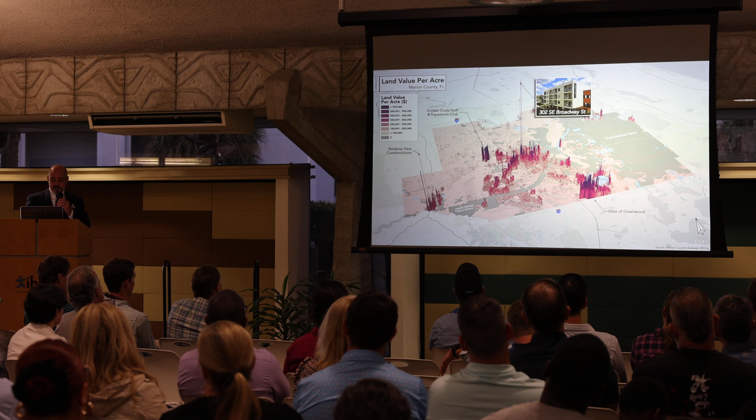So talk about it, because it does affect your community. This is your land value per acre model of your community. Why is there just one dirt parcel in your downtown that's so incredibly more valuable than everything else? Shouldn't that be more like a plateau? It's all the same downtown. This is looking at just some of the parcels that fertilize the soil under them - and remember, this is just dirt, no buildings.

So zooming into your communities, maybe taking a couple of neighborhoods - looking at West Ocala, it's coming in at about 53,000 per acre, and over in the historic district, there's actually a couple of historic districts, but it's looking at 234. My first question when I looked at this - I look at it like a CAT scan - is, why is the dirt in that historic district not uniform? It's all the same district, so it should all be the same value per acre. It's all the same access and neighborhood, because you see on the west side it's more uniform. So use these as maps to have a conversation and learn more about your community.

Okay, so now talk about what you saw in the model. Think of it as just a big bar chart laid on a map - these are the actual images in the bar chart. So everybody's got a Walmart. Your Walmart's about $400,000 of value per acre, and I'll keep the Walmart down on the bottom of this slide so you can see it compared to other housing types.

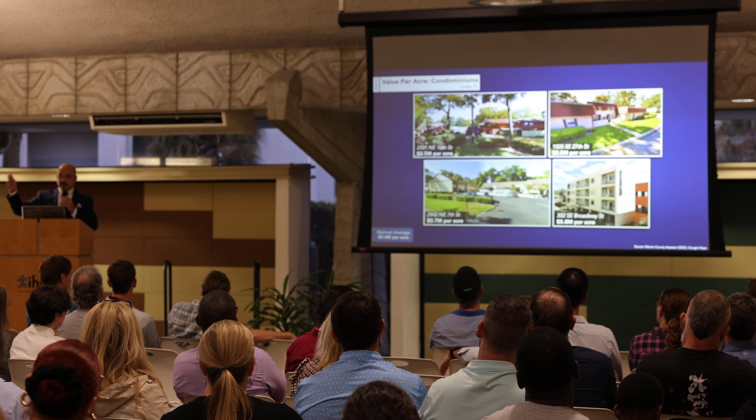But hang on a second before we go past this - these are 500,000 an acre, and that's 5.8 million an acre. They're both condos, right? So how you use land has a value productivity choice. Or if I blow through your real estate and have surface parking lots and berms and buffers and whatever else, it's going to dilute the value. Density is more productive, so there's basically an incentive in the tax system to make low density - that's the way it works.

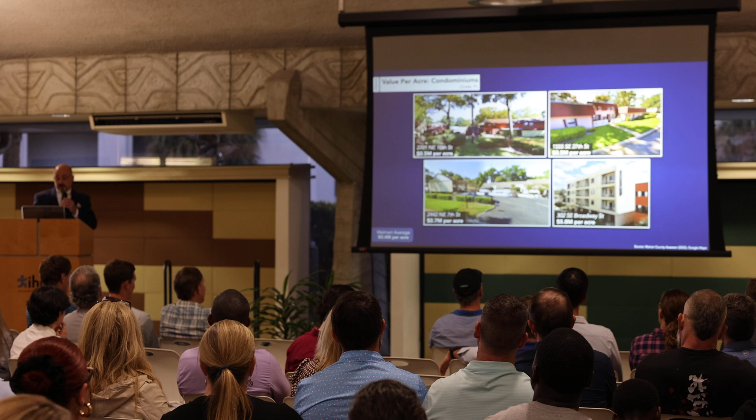But anyway, there's 800,000 - so here they are stacked up, your single family, multifamily, and again, this is countywide. I would take this information and go next level from here forward, look at your different neighborhoods in your community this way.

But we couldn't resist John Travolta's house, by the way. He's not here, is he? So he's out at that Jumbolair thing - that's his house with his jumbo jets. That's really cool. And we grabbed this house on 16th Court in West Ocala.

So here they are side by side. Travolta's house is about 20 acres, and that doesn't count the whole runway and all that other stuff - but this is just his section of that development, while she's on a tenth of an acre on the right. The tax value: his property's worth $2 million in value. Hers is worth $145,000.

When you look at the tax value per acre, it looks like this. So again, as county taxpayers, who's more productive? Jumbolair or the West Ocala neighborhood?

This joke might not work for most of the audience if they don't remember Vinnie Barbarino. It's a long time ago.

So we grabbed a couple of other neighborhoods to compare them, West Ocala with the 21st Street neighborhood. In this case, we're just grabbing the same number of houses to see their imprint in what they take. So we have 47 houses on the left and 47 houses on the right. The average value of the houses in West Ocala is about $93,000, while the average value in the 21st Street neighborhood is 262,000.

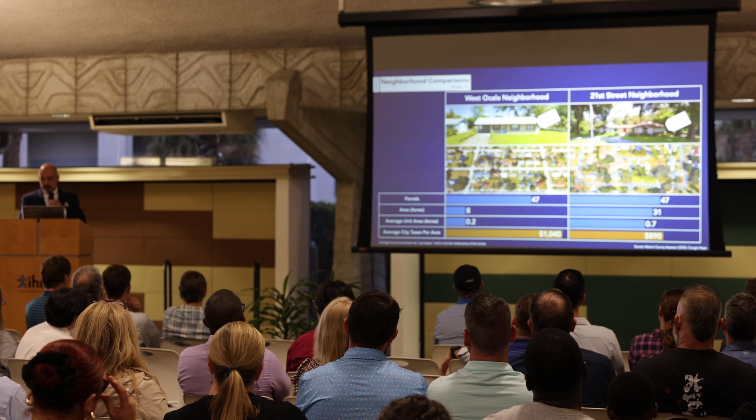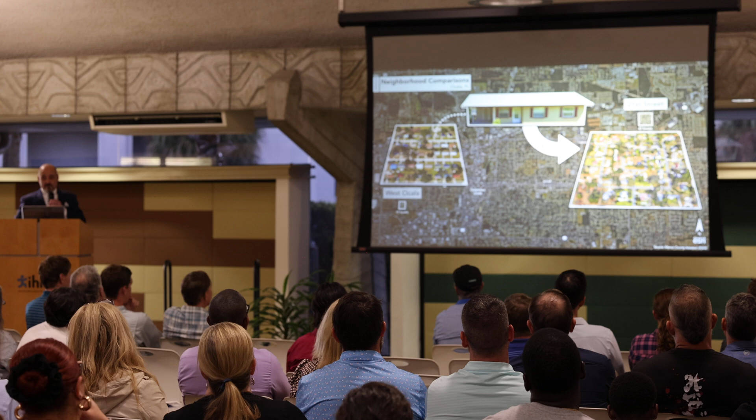So just for fun, we're like, well, what if we just developed West Ocala, or the 21st Street neighborhood, the way that West Ocala had developed, and let's see how many people we could fit in the same land area. It's 177 units would fit where 47 houses take up a footprint. Or another way of looking at it, here's the current value of the 21st Street neighborhood, about $6 million. If it was developed as West Ocala, with that house, it would be $34 million on the same territory, the same real estate.

So just be aware of these patterns that we've put down, how we've developed over time. There's results economically of what we deal with today because of it. So it's about, you get about 6 times the value out of it.

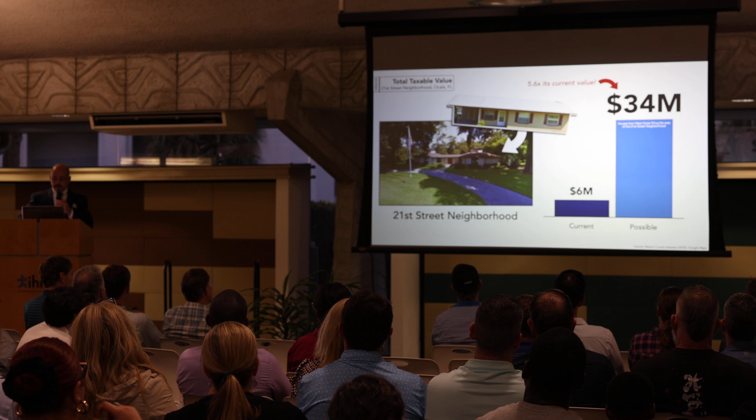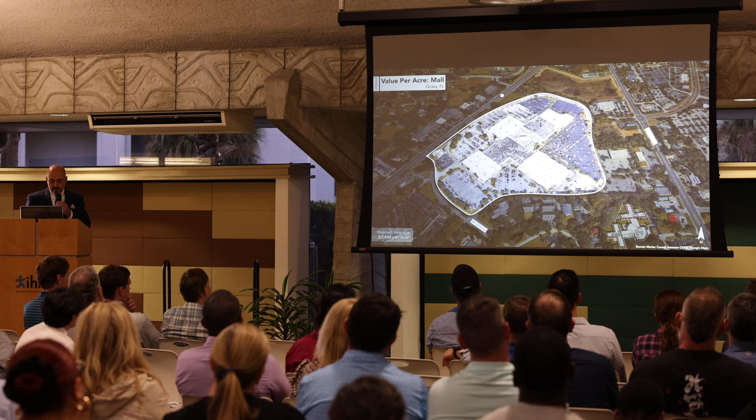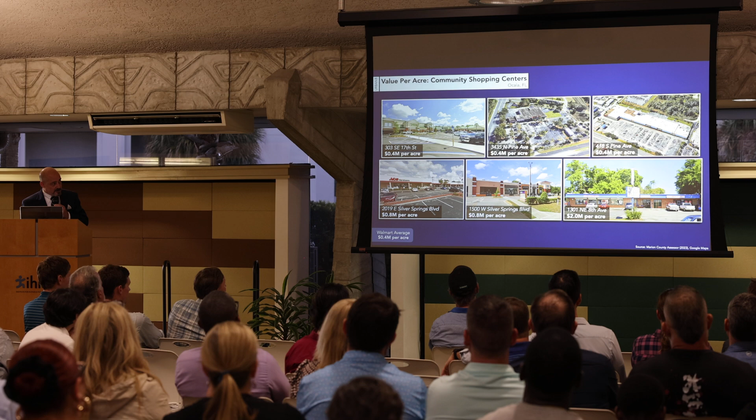So under the commercial, your mall is about $900,000 of value per acre. And again, that's double the Walmart. You can see the Walmart down there, it's still on the slide. So that's double the Walmart in productivity. A bunch of boxes here running from $400,000 to $2 million. Who would have thought that this thing is twice the value of the mall? But it is, 2.2 times.

And then you get into this commercial stuff. We start at like 7.3 million. I love O'Malley's, by the way, that thing's awesome. Was that like 8 feet wide?

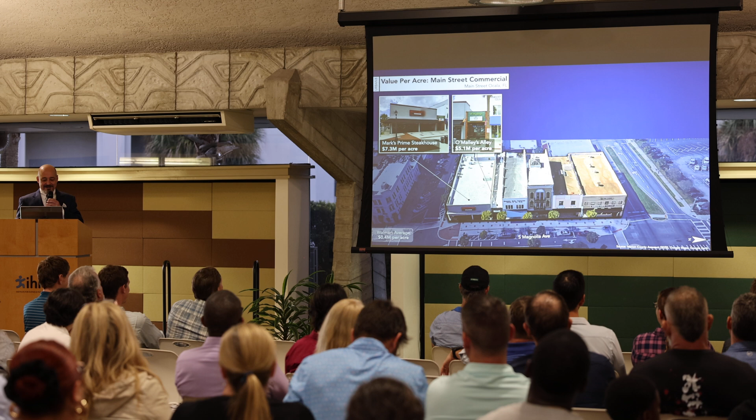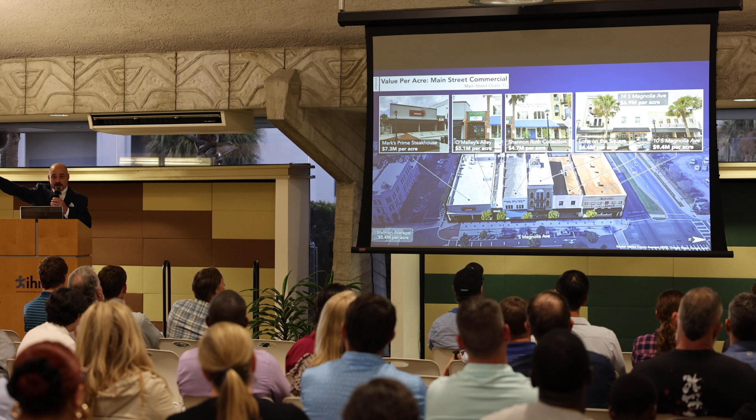Think what you can do with little buildings, make an incredible impact at 5.1 million per acre, 4.7, and then these last 3 are 4.4, 6.9, and 9.4 respectively. That's all like just 2 blocks away from here, right? So on average, your Main Street stuff's averaging 5.7 million an acre.

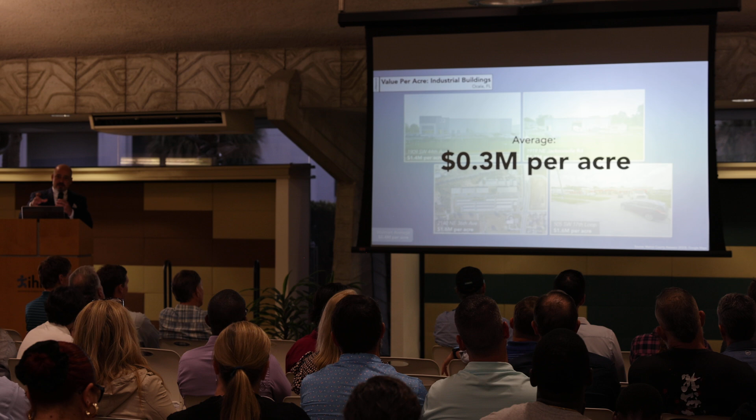And industrial, it is what it is. These are not that valuable buildings on a productivity standpoint. They're just really big boxes, but you need that stuff to produce jobs. So just be aware of that. Your average for industrial is about 300,000. And it's just, that's not surprising, it just is what it is. But be cautious about how much of that you chew through in your community and make sure you're getting jobs that come with it. Back to the final is mixed use.

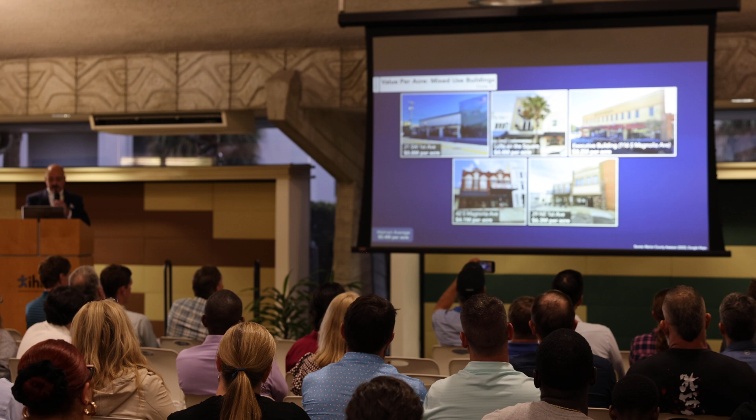You have, for some reason, these little houses put in the mixed use category. They're really just houses that were converted to office, so this is more, should be commercial. But these are true mixed use buildings where you have one use sitting on top of another. On average, your mixed uses are pulling at about 2.6 million per acre.

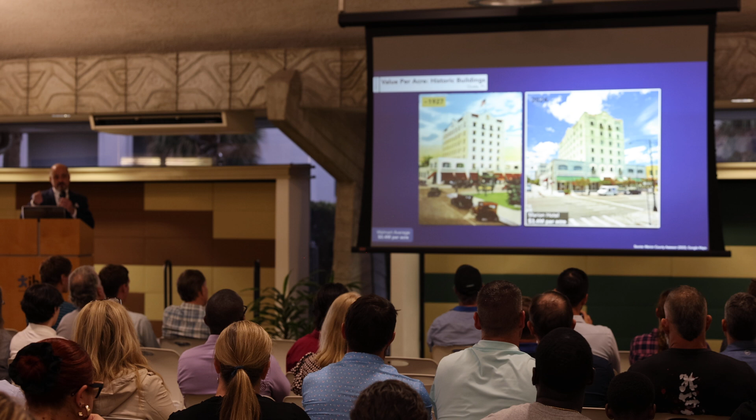But within those are these older buildings. This is just a couple blocks away from here being rehabbed. Right now it's pulling 3.4 million an acre. What will this be when it's done? It's going to be incredible from a productivity standpoint. So from a bang for the buck standpoint, you can yield a lot of juice from that squeeze on that one. But let's not forget what your great grandparents left you. So here you are. That's your downtown right there.

That's back when you had horse technology. They built these buildings that lasted over 100 years. This one right here is pulling 16.7 million an acre out of that. That's the biggest producer in your community, the most potent building in the model by far. Not just heads and shoulders above it, it's miles above it.

When people look at our models, they often say, well Joe, you just want skyscrapers everywhere. I'm like, no, that's not true. Is that a skyscraper? These little buildings can be highly, highly potent.

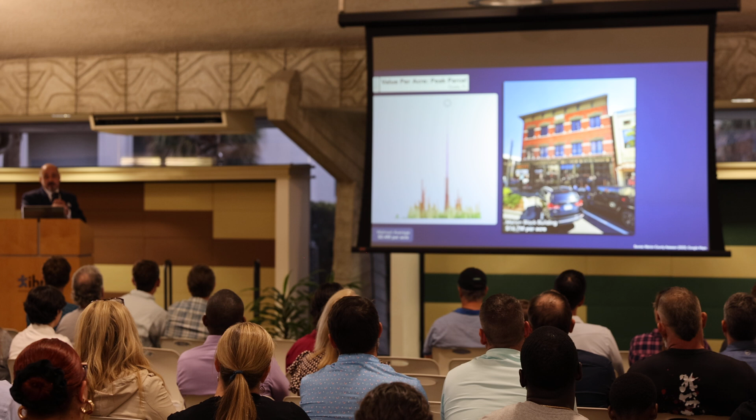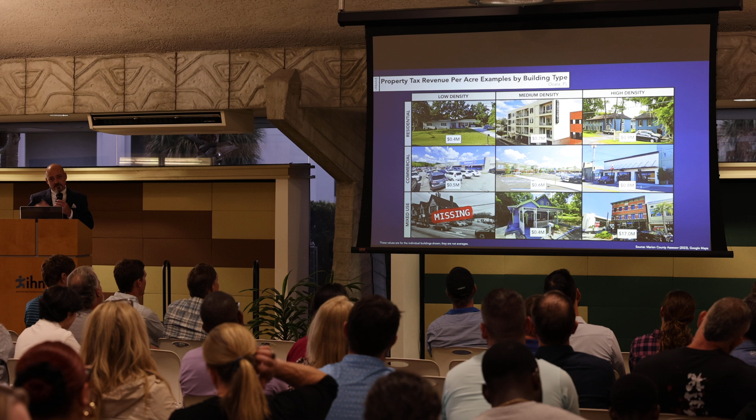So just to close, this is like looking at all the slides. I call this a Brady Bunch slide. It's across the top we have residential - low density, medium density, high density - commercial, and mixed use. This is just a roll up of the slides you saw earlier, so you can see the reduction sauce of the whole thing. And this is how it stacks up.

So basically what we've learned from Ocala is your mixed use stuff, particularly the higher density stuff, really jumps up, which is a lesson that you could apply all over your community. It doesn't necessarily have to be just in your downtown - you can have baby versions of downtowns around your community as well.

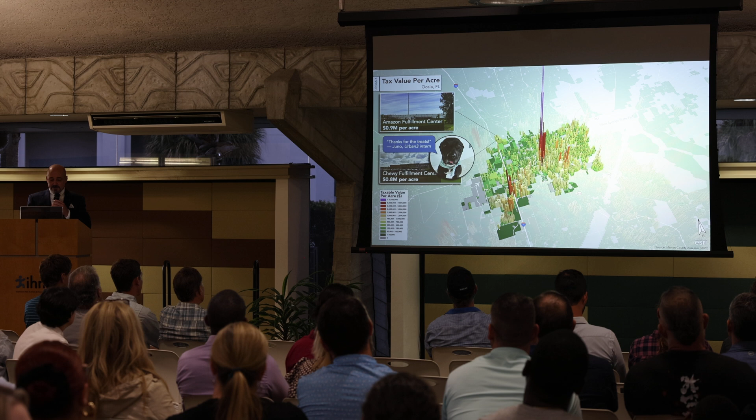So here's - oh, by the way, we have an office dog. Her name is Juno, and I'm not making this up. She gets her Chewy stuff from your fulfillment center, so she's really excited about this.

But there's your fulfillment center with your Amazon. They're really not that productive, but they are what they are. These are a typology that usually follows highways because they're distribution centers, mini distribution centers or hubs.

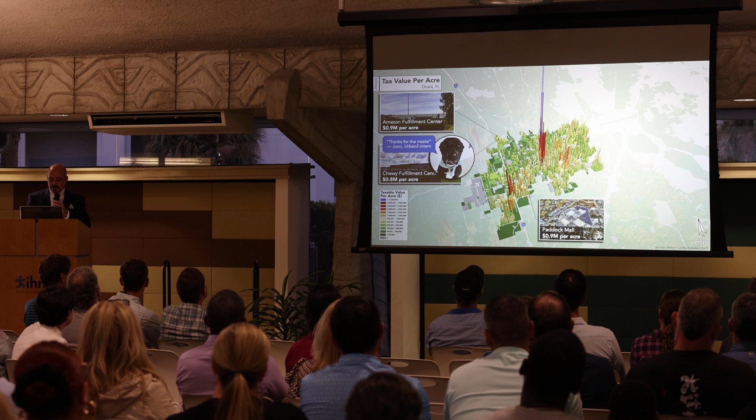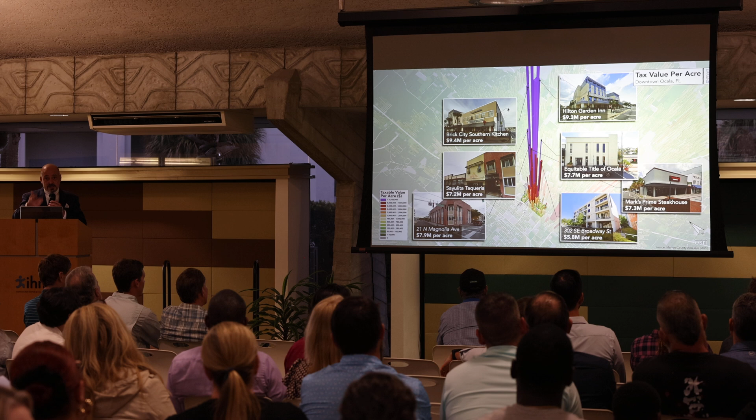And then here's just your different buildings from the model shot. So this is, again, the same information, just seeing the images on a map, if you will. And then your downtown and what's going on in here. When you look at your downtown this way, you can really start to see how it drops off, just walking a block or 2 out of the core, how much it drops off. So that's an opportunity you already have - these examples exist in your community, just do more of them, if that makes sense.

One of the things we notice with your growth: your county is going through a massive growth spurt now, but your city went through that growth spurt in 1960. Maybe this is a lesson for the county. What could you learn from Ocala, which is essentially the grandparent to the county because it's already been through that growth spurt.

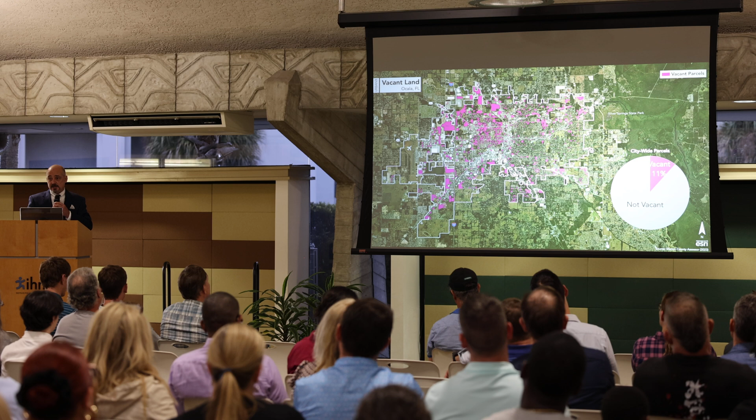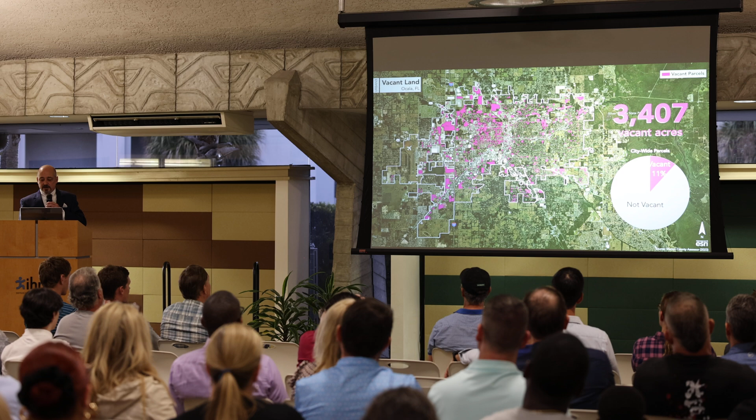So just make that a priority, as a community. Target that as an opportunity. You have 3,400 acres of vacant real estate.

The other question we asked was, is the dirt worth more than the building on top of it? Just because it's not vacant doesn't mean it's not upside down. So financially, if I had a dead Dunkin' Donuts or Jiffy Lube or something like that, it's not a contributor. There might be a building there, but it's empty.

Y'all know CRAs, what they are and what they do? Anybody not know? Basically, it's a redevelopment tool that's empowered in the state of Florida to do redevelopment.

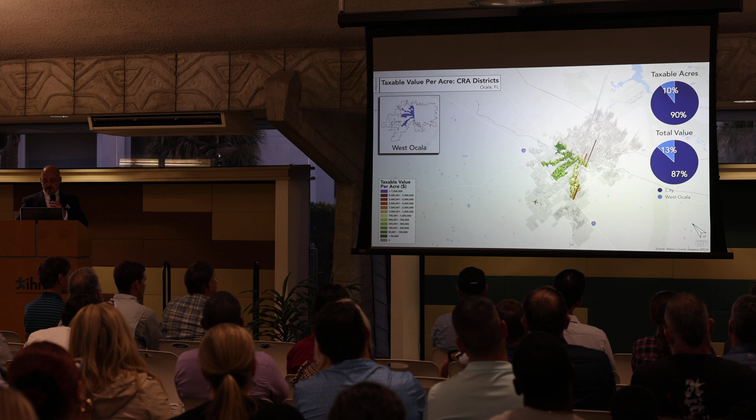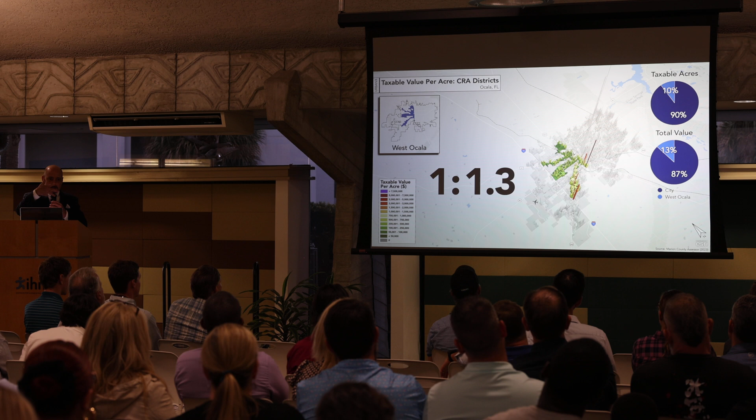This is kind of nerdy to do this time at night, but I'll show you we did them. I recommend you get the PDF and look at these. This is your West Ocala CRA, 10% productivity, 13% value productivity of land, a 1-to-1.3 ratio. These are all imperfect because they have different weird boundaries. You can see this one looks like a reverse letter E. It's kind of arbitrary as far as the shape of the boundaries.

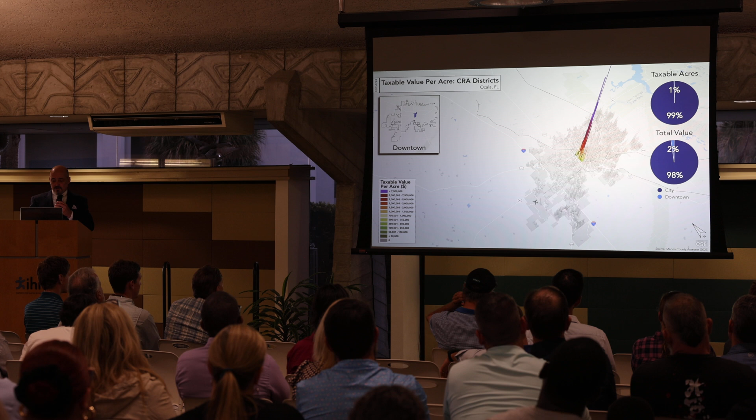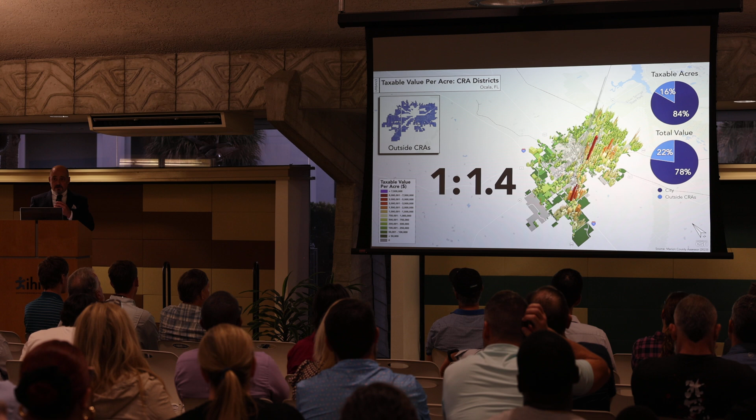This is North Magnolia, it's a 1-to-1. East Ocala is 1-to-1.4, and downtown is 1-to-4. Again, no perfect numbers here. When you look outside of the CRAs, it's about what some of your CRAs are. So it's no more productive, it's just a different territory.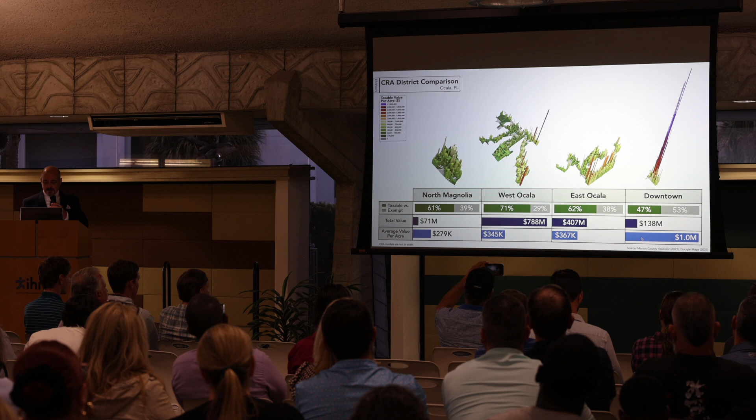And then these are the top producers in each of them. Surely you could do better than Advantage Automotive in North Magnolia, which is the big winner there. So again, find opportunities to create jobs, but also use your leverage as a CRA to make activity happen in those neighborhoods. But be mindful of displacement, and then it will cause gentrification.

Just to tell you, that was a big broad brush on the revenue side. We did this, it's more of a light brush on the cost side, to see how the costs look against your revenues. And I'm going to turn you into a little bit of weird stuff here.

I don't know if y'all know this, but municipal governments list roads and pipes as assets. Whenever we sit down with a finance officer, the first thing I ask is, can Ocala sell their roads to Gainesville? No. Like I can have a computer, a van, or an office, I can sell you all three of those. Can you sell your streets? No. So it's a liability.

So when you look at your books, and this is standard for most municipal governments, you really don't see the full liability that you're carrying because it's seen as an asset.

So when you buy a road or get a road from a developer, if I build you a road, you're stuck with it forever. I'll build a subdivision, put a road through it, break it down into 150 parcels that I sell you as houses, and the cost of the road is baked into your mortgage. Then I'll turn around and give the road to the city, and the city's stuck with it forever, right?

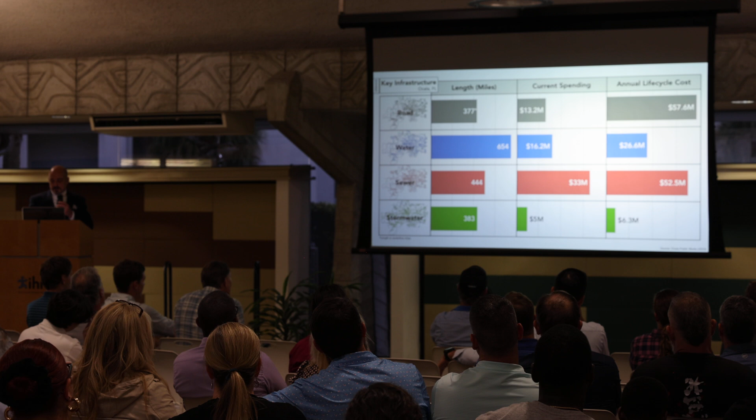So this is just how they stack up in their annual life cycle costs. These are the numbers we worked with for the analysis. And here's how it looks from what you are spending versus what you should be spending. So this is what you're spending in your systems on the left here, and this is what you should be spending.

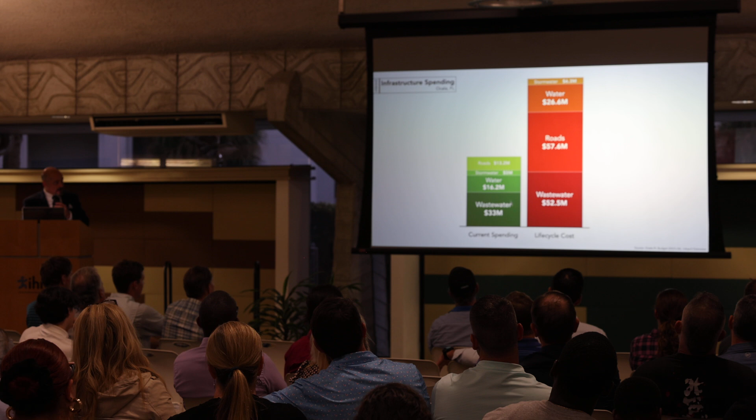So you're essentially carrying an operating deficit of $76 million. So when you see a road isn't in good condition, or that you don't have a sidewalk in a certain spot, or maybe you hear about a water pump failure, it's not that the city isn't doing its job. It's just that we don't have the capacity and money put in the right place because you aren't collecting it. That's the reality of what you built.

There's a great old colonial barb where people used to say, don't tax me, don't tax thee, tax the fellow behind the tree. We're a country of tax evaders, folks. What did we do when they taxed our tea? Threw it in the bay, started a revolution. People don't like to pay taxes. That's cool, that's human. But you bought stuff, you got to fix it.

So I just want you to know this is not unique to Ocala. This is a condition we have in our country about how we view government and land use, and it's kind of naive. So we went ahead and added that loss into the system.

So here's your money coming out of the ground - this is the revenues. If you think of this whole city as a boat, this is what's above the water, and what's below the water is the sunk cost. And so your net position is a net deficit, but not for everywhere.

Some properties are paying more their share into the system. This isn't to say - this is again a community choice y'all can make - that everybody has to be net neutral, because you're going to want to subsidize certain things: a school, affordable housing, a park. Those are things you need to buy down for community services. At what trade-off? Just make sure you can afford it. So this is just showing you some of those examples.

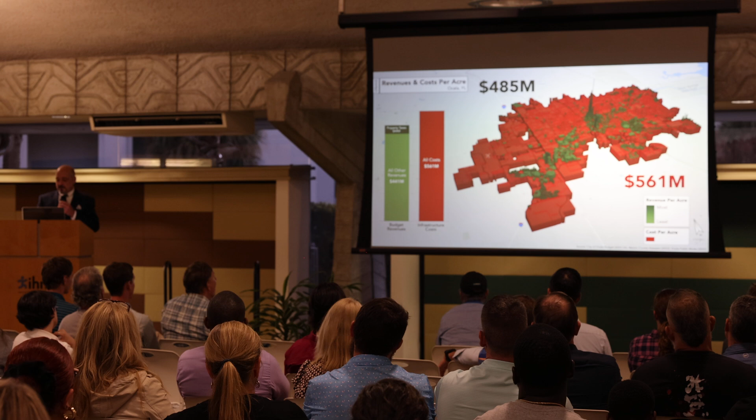And finally, some growth projections. Taking all of the vacant lots and saying, what if you prioritize those? Right now, the value of all your vacant lots is about $10.3 million. If you just dropped a $300,000 house on every vacant lot, come hell or high water, you'd go from 10.3 million to 78 million. You'd add 1,300 more houses and grow 758% more revenue. This would also help solve your housing problem if you're having one.

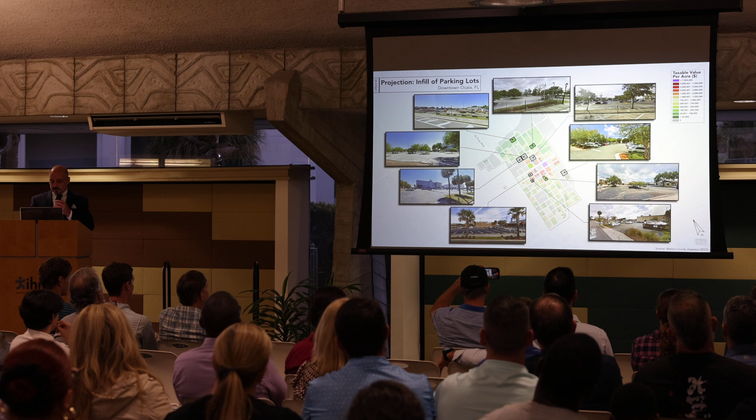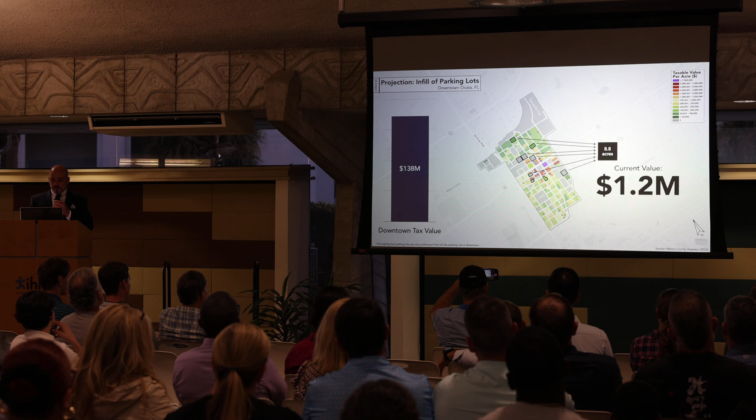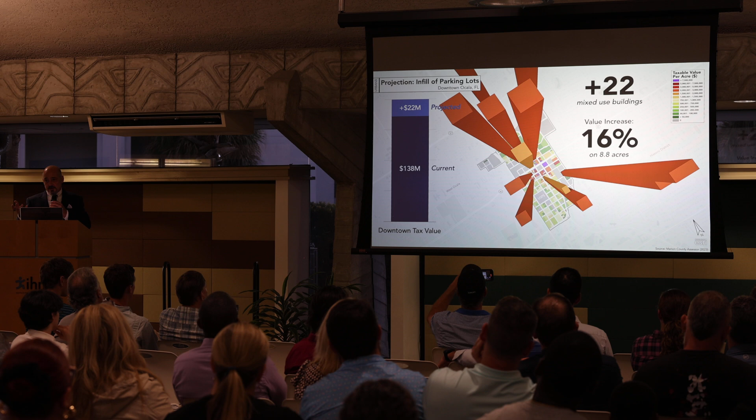Does that make sense? So here's how you can put this to action. In downtown, we grabbed some surface parking lots and underdeveloped real estate, nothing to write home about. If you prioritize those, that's 8.8 acres, currently valued at 1.2 million. We dropped some buildings on it, nothing huge, just some random buildings added on. This is the new value you'd get, another 22 million in property value on top of your 138 million. Here's where they'd pop up. That's 16% growth, not as productive as housing, but still production.

We just ran those models for you so you could have it. I know I've gone long, and I want to wrap it up now. This is a lot of information, a lot of different examples. I threw a lot at you.

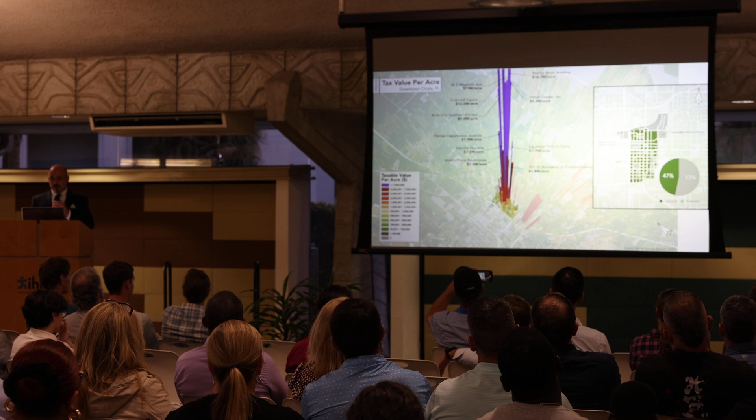The takeaways you have now: definitely focus on your Purple Mountain, your stuff downtown. Grow more of that. Look at the vacant land as an opportunity. Look for productive examples of things you already have in your community and do more of that. You don't have to transplant Tampa or Orlando here. Little buildings can have a big punch. Think about the long-term effect for future generations, think about your grandkids and what they can yield. That long-term investment is worth the wait, worth the gain, and worth the effort. You'll get more out of it.

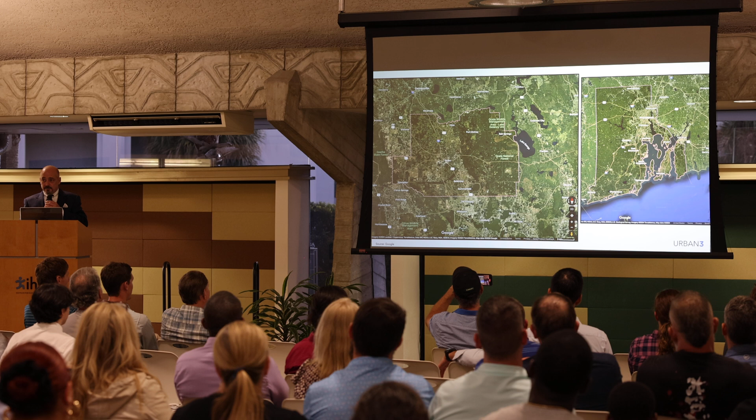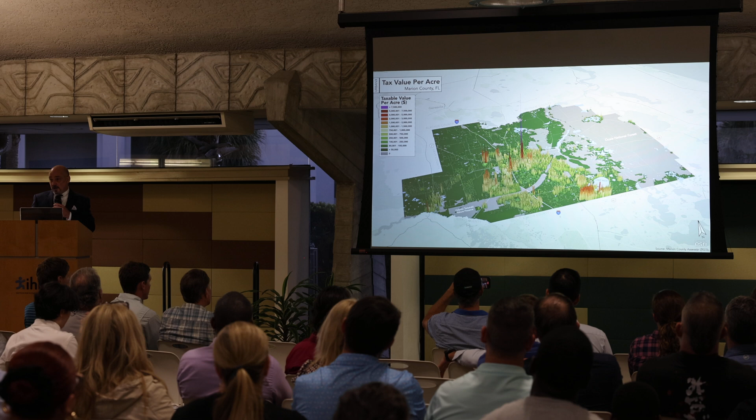Also start a regional conversation. This is Marion County. I know there are several county people here, and this is Rhode Island at the same scale. You're bigger than Rhode Island. What blows my mind is you have 5 cities and towns in this county, and Rhode Island has 39 cities and towns. So you've grown out, but what are you growing? Is it just a suburb of Ocala that happens to be in the county, or are you growing places that can stand on their own two feet? Are you investing in areas with their own downtowns, their own core areas, their own mix of housing? Just be mindful of that. As you look outside your county, think: you're adding people, but what are you adding? That's a question I wanted to leave with you.

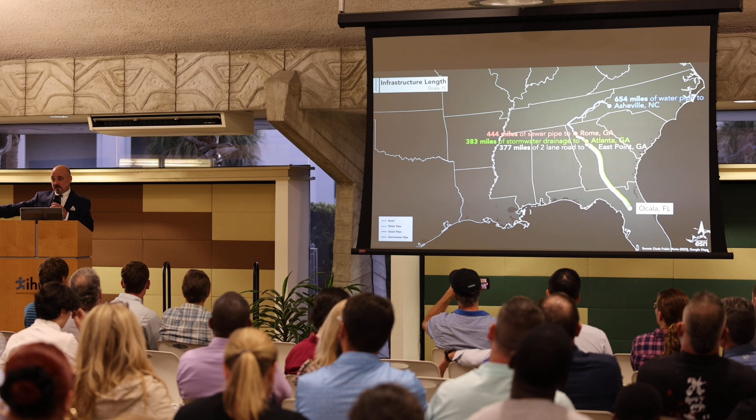Remember that infrastructure is forever. You've got to keep paying for this stuff. This is a lesson the county can learn from the city. The city's already had 100, 200 years of head start in all of this. What kind of heart attacks has the city had that the county can learn from? Because this is what the city's dealing with. We call this geo-accounting, we put it on a map so you can see it. Understand that the costs you carry across your model have consequences.

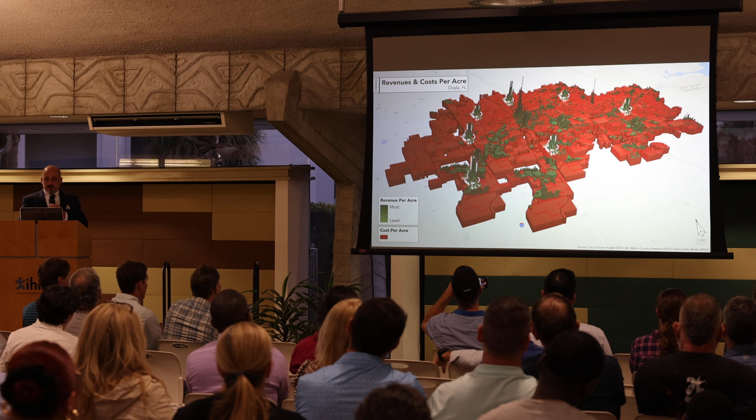So as you go forward planning, view this like a radiological report. What's your surgery going to be? Definitely do more surgery in your downtown, but there are other areas outside where you can add things like neighborhood centers, so you can have a coffee shop. Remember, little 2-story buildings could do it out there. And prioritize your infill, this should be your number one priority.